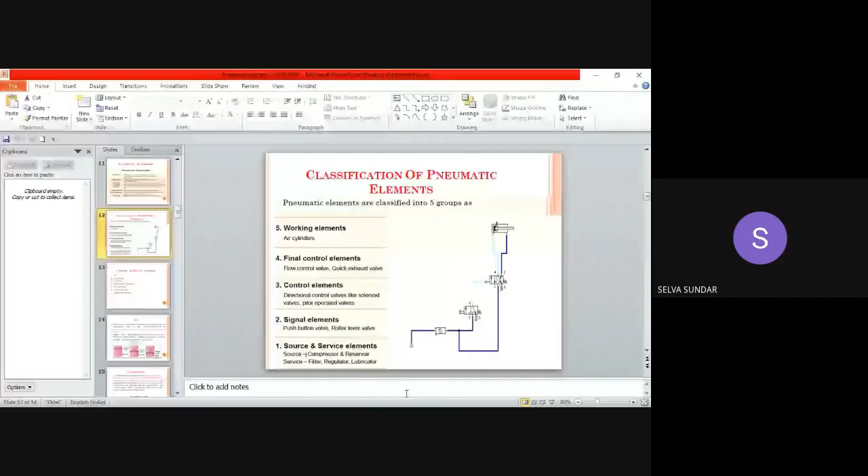So I hope my screen is visible to all. Whether my screen is visible? Yes sir, yes sir, it is visible.

So I welcome you all to this 3-day workshop on building smart automation design without coding. Today's session we are going to discuss about the pneumatic system - how automation can be done with the help of a pneumatic system, and what components are required to design and frame a pneumatic circuit for automation purpose. These are the topics we are going to discuss in this session. If time permits, at the end of the session, we will work on a hands-on session.

Before entering into the pneumatic system, we must know what is meant by automation. Automation is basically the delegation of human control function to technical equipment for the purpose of increasing productivity, increasing quality, increasing safety in working conditions, as well as reducing the cost. So the purpose of automation is to replace the human control function with technical equipment in order to improve certain criteria.

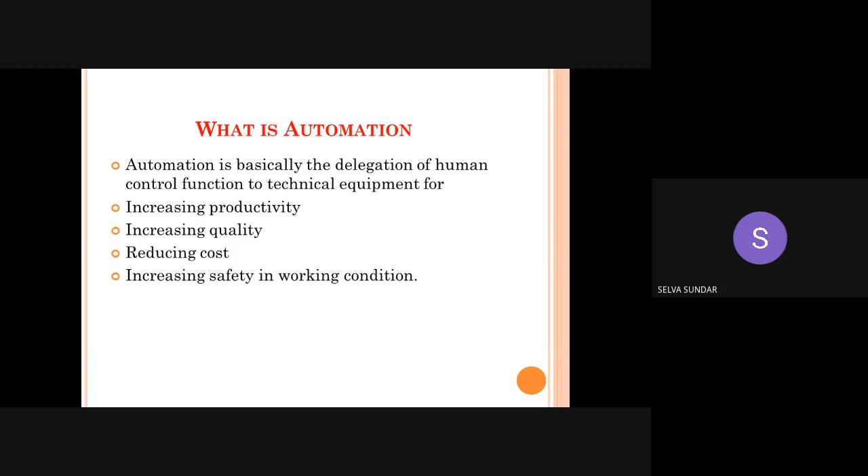Next, industrial automation is classified into 3 categories. The first one is pneumatics and hydraulics based automation, the second is electrical based automation, and the third is electronics based industrial automation. Out of these 3, pneumatic systems are used in achieving low cost automation in industries in order to reduce labor cost, reduce machine investment cost, increase productivity, and reduce human efforts.

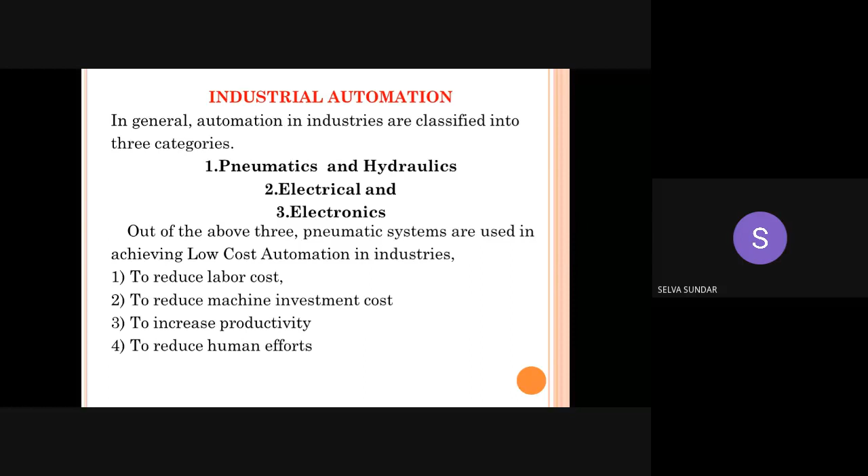Before entering the pneumatic system, we must know the difference between pneumatics and hydraulics. What is meant by pneumatic system? Air or gas is used for working of the system in pneumatic system. In hydraulic system, fluid is used for working of the system. In pneumatic system, the producing power is less, but in hydraulic system, more power can be produced.

In pneumatic system, it is able to work at pressure up to 10 bar, but in hydraulic system, it can work from 100 bar up to 700 bar. That is the main difference. Working pressure is only 10 bar in pneumatic system, but in hydraulic system we can work up to 700 bar pressure. Next, in pneumatic system, the working fluid is available at cheap rate, because we are using air as the source.

Air is readily available in the atmosphere, but in hydraulic system, the working fluid is costly as compared to pneumatic system. In pneumatic system, this process is clean, but in hydraulic system, the maintenance is the major problem. In pneumatic system, it is easy to operate, even unskilled labor can operate a pneumatic system. But in hydraulic system, with high pressure, it is difficult to operate. Only a trained person can operate the hydraulic system.

In pneumatic system, the maintenance is easier and quicker. But in hydraulics, the maintenance is not easy. The last difference is that pneumatic system has low initial as well as operating cost, but in hydraulic system, it has higher initial and operating cost. So this is the basic difference between hydraulics and pneumatic system.

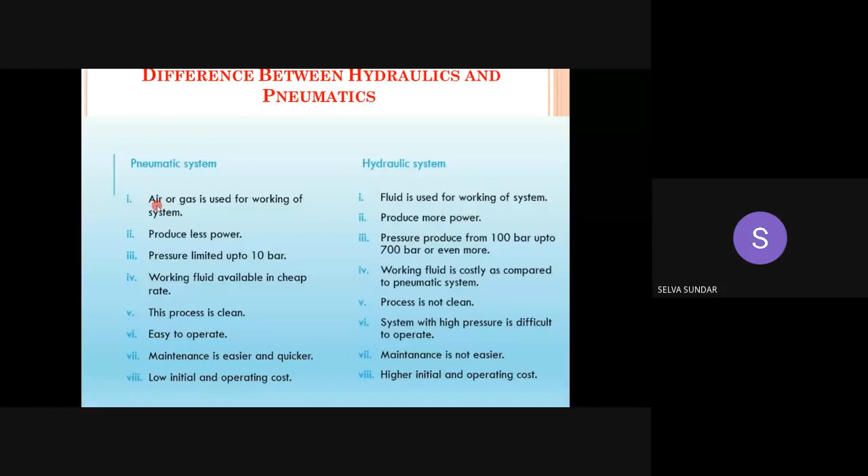But today we are going to discuss pneumatic system. Pneumatic system can work up to a pressure of 10 bar. So that is the main thing we have to keep in mind while designing our pneumatic circuit for automation purpose.

We move on to pneumatics. We must know what is meant by pneumatics. We already know pneumatic is nothing but air which is readily available in the atmosphere. The word pneuma is derived from the Greek. Pneuma is nothing but breath or air.

Pneumatics is the application of compressed air or pressurized air to power the machine or control or regulate the machines. Simply put, pneumatics may be defined as a branch of engineering science which deals with the study of the behavior and application of compressed air. So pneumatic is nothing but compressed air. With the help of pressurized or compressed air, we are going to give power to the machine or control the machines. That is the main definition of pneumatics.

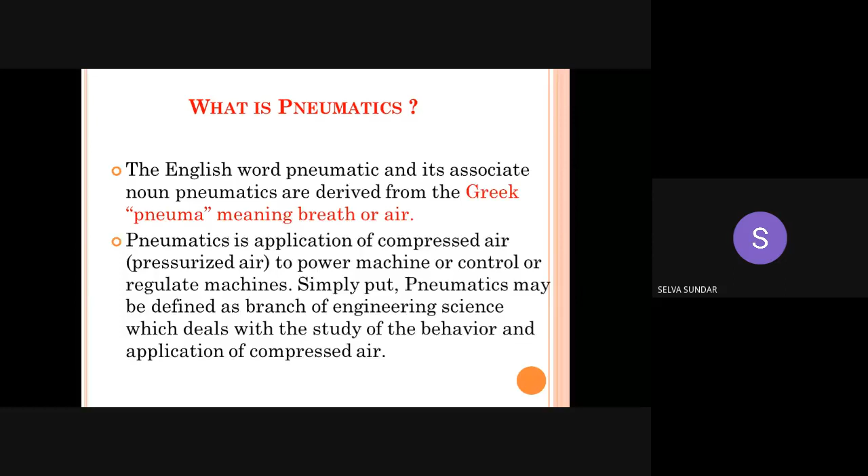We have another definition according to our mechanical division. We can call pneumatics a mechanism which uses air pressure to apply mechanical force and displacement. So we can write the definition of pneumatics in mechanical division as: mechanism which uses air pressure to apply mechanical force and displacement. The pneumatic devices we use are basically binary actuators, which we use for automation purpose. The linear actuator means the cylinder.

The cylinder, inside the cylinder we have a piston. The piston can either extend or retract. So we are going to design our pneumatic system in a linear way by using the linear actuator, meaning we can extend our cylinder as well as retract our cylinder with respect to our requirement.

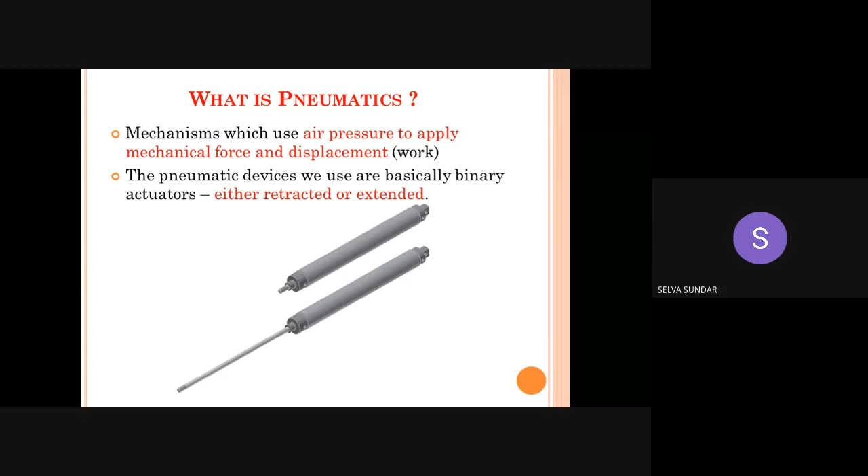The advantages of pneumatic system: we already know it is easy to control, can apply a lot of force from small light packages. It is inexpensive, it is easy to clean. Next, pneumatic tools when overloaded will stop and so are safe as compared to the electrical system. This is the main important advantage of pneumatic system when compared to the electrical system. Next, no fire hazard as in electrical system, so it can be easily used in dangerous areas like mines.

In mining areas also, we can use the pneumatic system instead of electrical system. Next, simple in construction, the pneumatic system components are easy to maintain and repair. We already discussed this in the difference between hydraulics and pneumatics. The last advantage is that the used air is exhausted, so there are no return lines as in the pneumatic system. We don't need to maintain a returning line because we just send out the exhausted gas or air from the cylinder to the atmosphere.

Okay, that is the main advantage of pneumatic system.

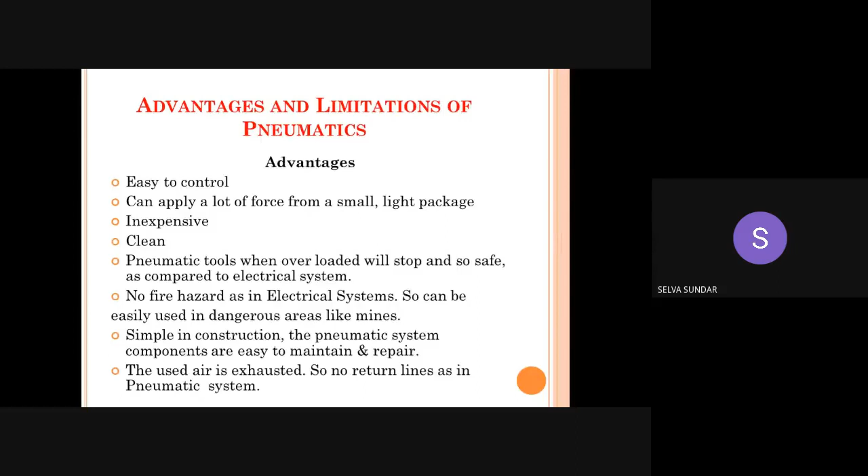Next, the disadvantages of pneumatic systems. The first is lack of precision control, so it's not possible to maintain 100% accuracy in automation using pneumatic systems. The second disadvantage is sensitivity to vibration, which is a major problem since a lot of vibration is created while using pneumatic systems, so we have to reduce it using a damping system. The next disadvantage is that it is loud and noisy, with a very high noise level. These are the major disadvantages of pneumatic systems.

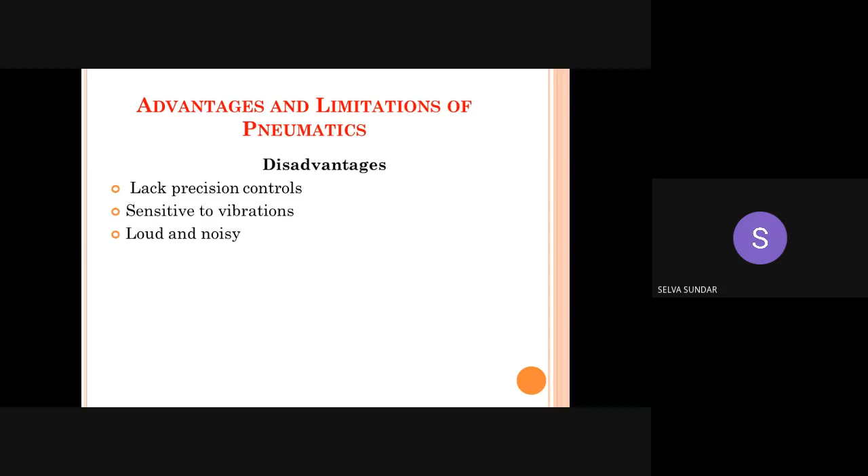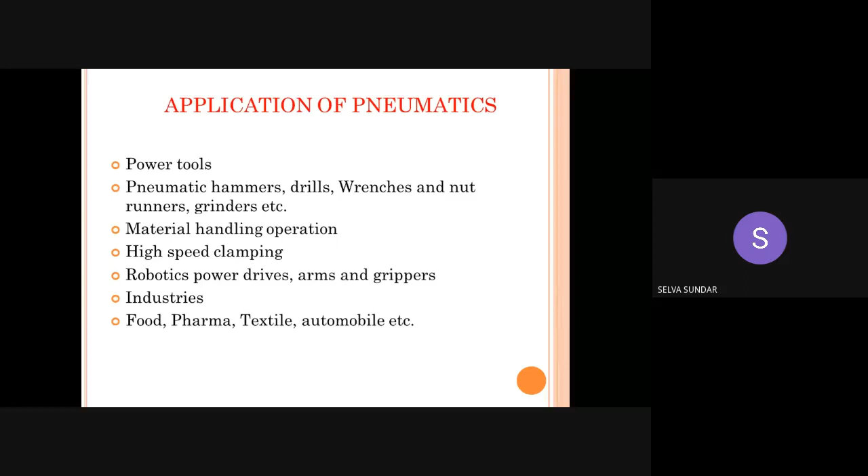Next, the applications of pneumatics. Pneumatics are used in various areas like power tools, pneumatic hammers, pneumatic drills, pneumatic wrenches, pneumatic nut runners and grinders. Also material handling operations, high-speed clamping, robotics power drives, arms, and grippers. Many industries use pneumatic systems for automation, including food, pharma, textile, and automobile industries. These are the applications of pneumatic systems.

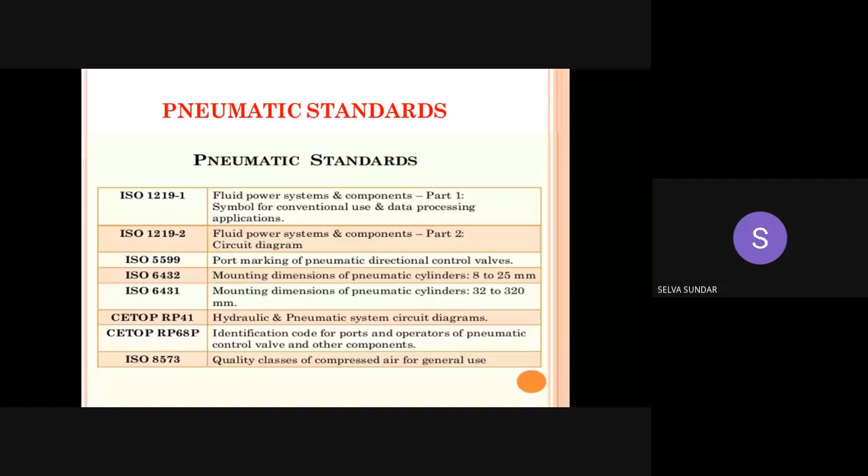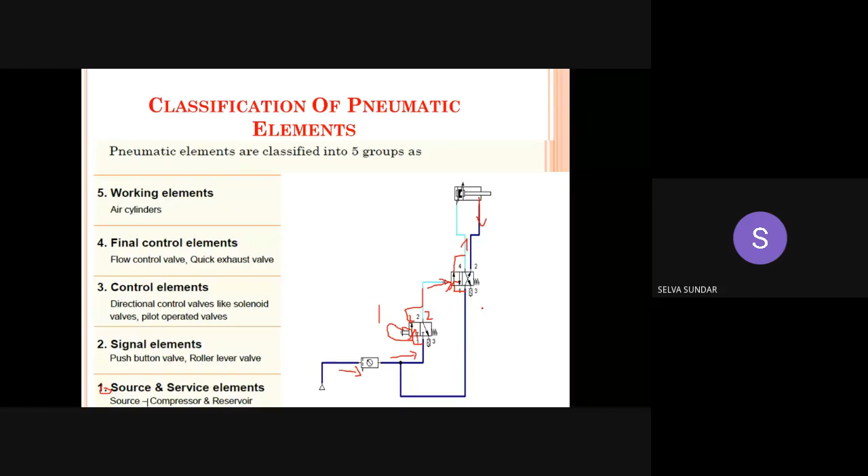So this is the basic working of pneumatic circuits. Now we will discuss one by one the various components available in pneumatic circuits. First, the source and service element.

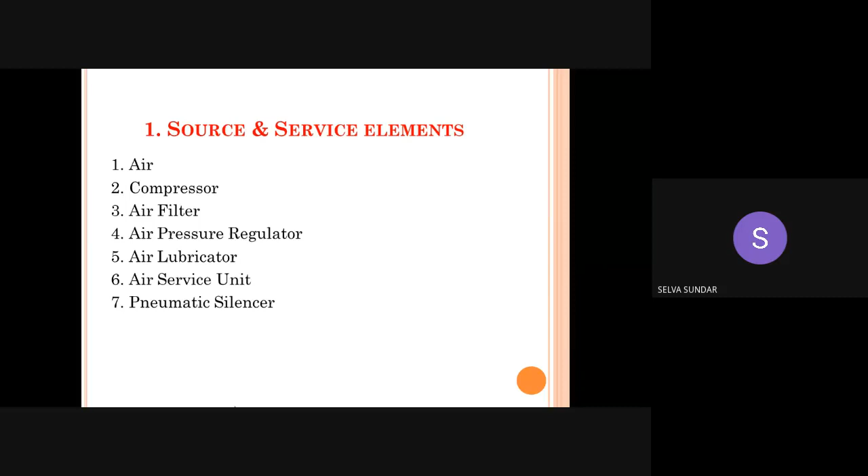The source and service element normally contains these categories: first is air, second is the compressor, third is the air filter, fourth is the pressure regulator, fifth is the air lubricator, sixth is the air servicing unit, and seventh is the pneumatic silencer. Air is the main source of the pneumatic circuit.

We already know air is readily available in our atmosphere. Due to the compressibility of air, increasing the pressure causes a decrease in the volume of air. Our pneumatic circuit works with the help of air from the atmosphere, and this pneumatic air works under the principle of Boyle's law.

So what we must know is what Boyle's law means. Boyle's law states that pressure and volume are inversely proportional to each other — if the pressure is increased, the volume automatically decreases. That is Boyle's law, as long as the temperature does not vary. So Boyle's law is nothing but PV equals constant, as long as the temperature does not change.

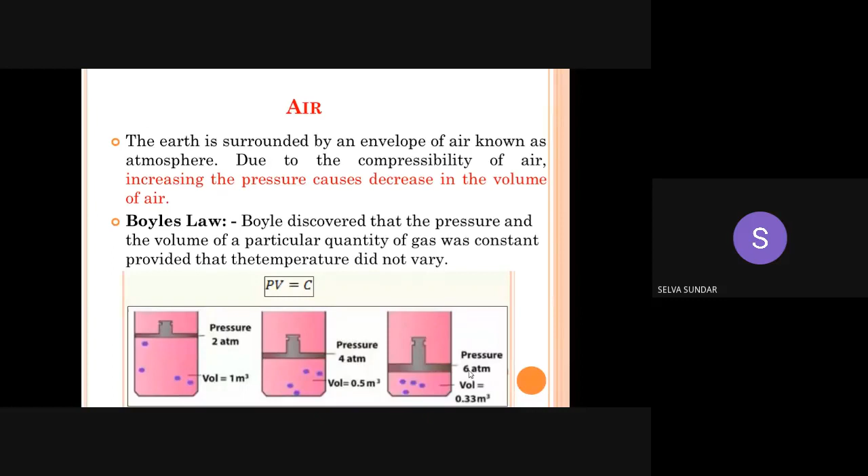By using this principle only, our pneumatic system is working. The principle is Boyle's law — pressure and volume are inversely proportional to each other as long as the temperature does not vary, that is, PV equals constant.

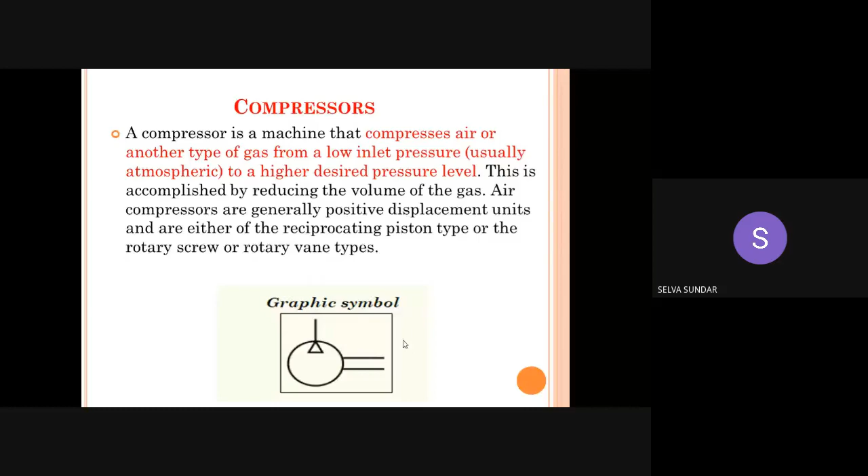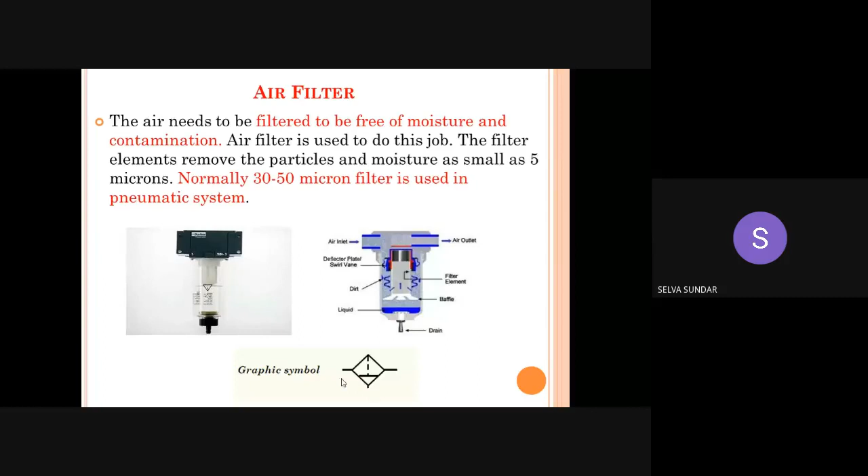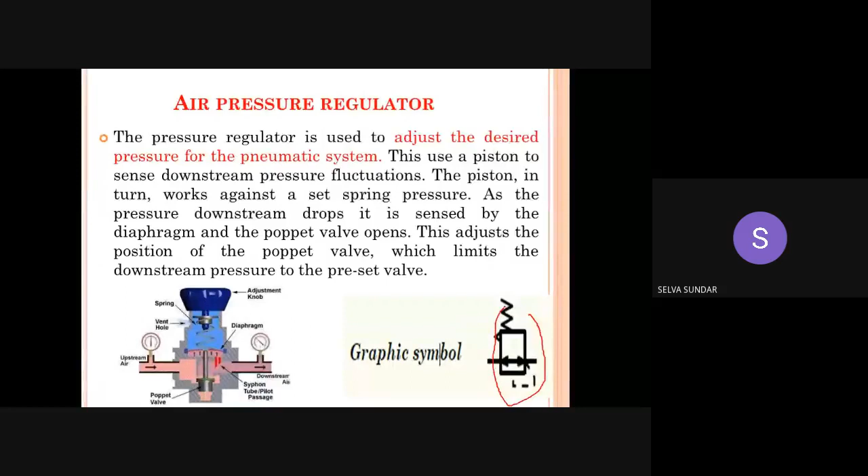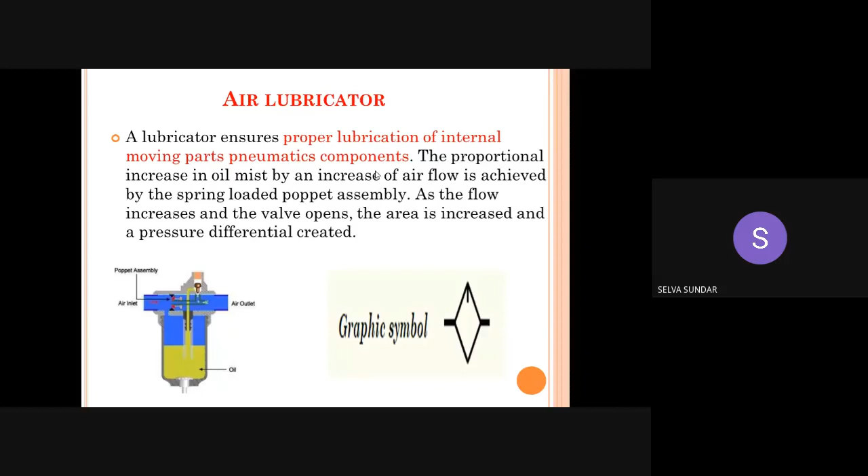Next, air lubricator. The lubricator ensures the proper lubrication of internal moving parts of pneumatic components, because we have a large number of moving components available in the pneumatic system. Due to the friction, heat will be generated, so we need to reduce the heat level. For that purpose only we use air lubricator. By using the air lubricator, we can reduce the heat generation level. This is the symbol of air lubricator.

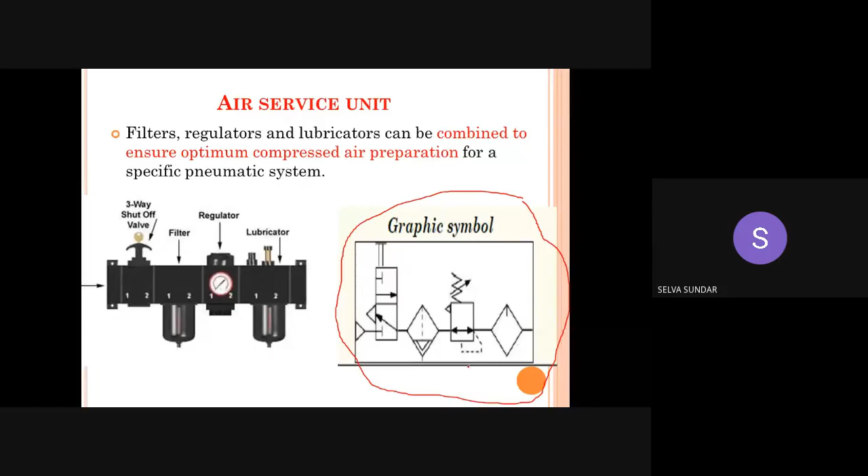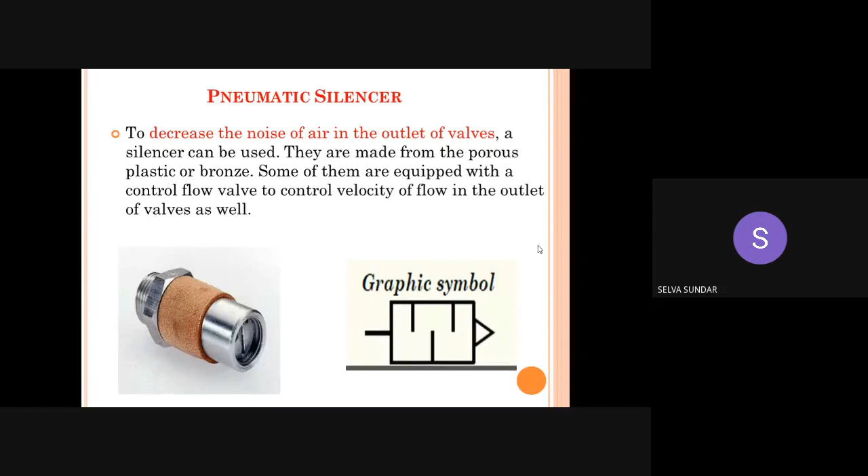Next one is the pneumatic silencer. The purpose of using pneumatic silencer in the pneumatic system is to reduce the noise of air at the outlet of the valve. It's just like a silencer which is used to reduce the noise level while emitting air to the atmosphere. This is the graphical symbol of pneumatic silencer.

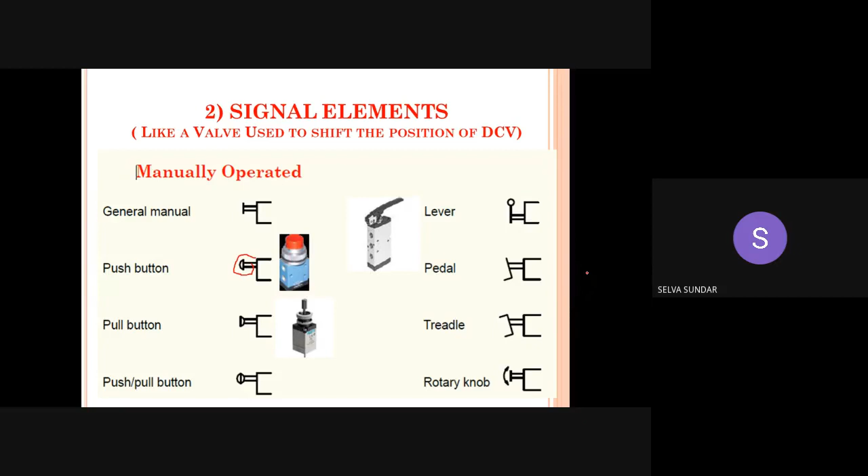Next, push or pull button. Next, lever type. Next, pedal type. Next, treadle, which is nothing but the kind of valve or switch we already use in our sewing machine. Next, rotary knob. So these are the manually operated valves. By using these valves, we are going to shift the position of the direction control valve.

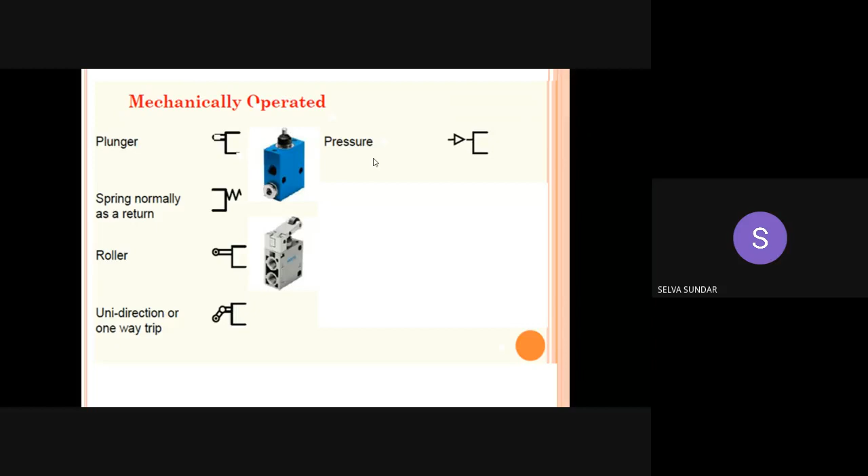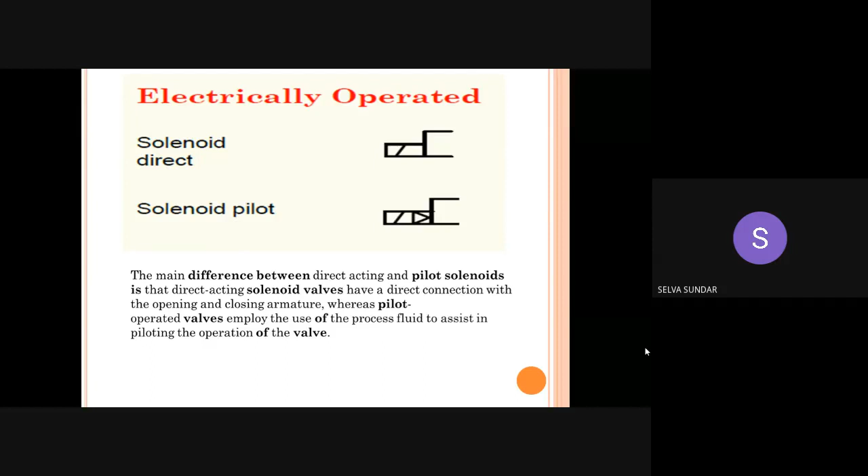Next, solenoid pilot. What is the difference between the direct solenoid as well as the pilot solenoid? The direct acting solenoid valve has a direct connection with the opening as well as closing armature, which means our cylinder. Whereas the pilot operated valve employs the use of a process fluid to assist in piloting the operation of the valve. That is the main difference between solenoid valve and pilot operated solenoid valve. That's all about the signal elements.

Next, our third and main important element is direction control valve. The direction control valve is the extend and retract control for your pneumatic cylinder. It provides a flow path from the compressor to the cylinder and a return path from cylinder to the atmosphere. The purpose of using direction control valve is to change the direction of flow of air to the cylinder and to the compressor.

We have various types of direction control valve. First one is 2x2, next one is 3x2, 4x2, 5x2, 5x3. We must know what is the meaning of 2x2.

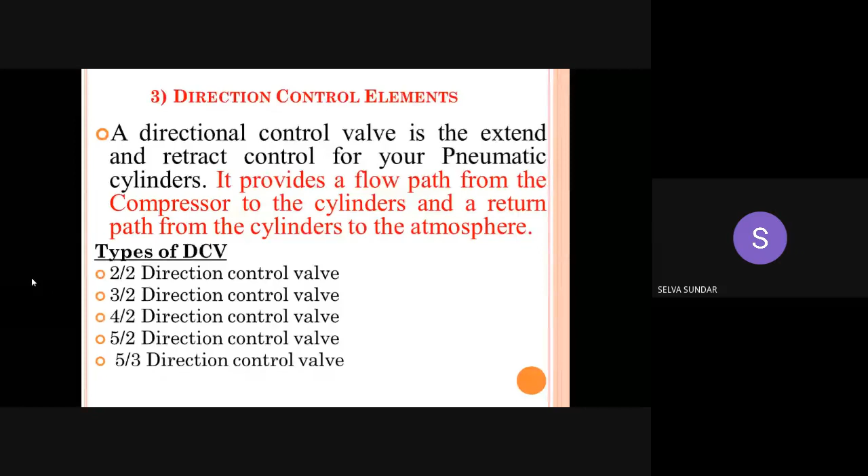The numerator value mentions the number of ports, or number of holes, available in the direction control valve. The denominator value mentions the number of positions in the direction control valve.

Let's see one by one. Before we enter the direction control valve topic, we must understand the number of positions as well as the number of ports in the direction control valve. First, we will discuss the number of positions.

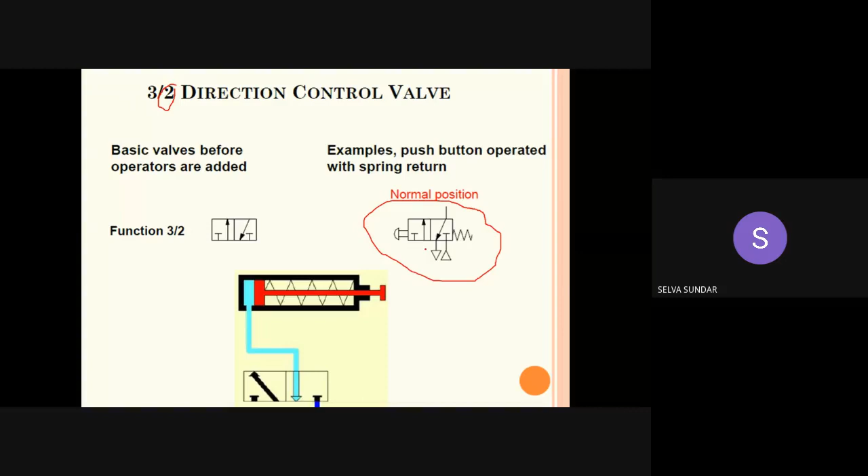Okay, next, the example for 3x2 direction control valve. So here I have 3x2 direction control valve. Why do we call this direction control valve as 3x2? Because the number of positions is 2, here we have 2 square boxes, so the number of position is 2. And the number of ports is 3. The air can enter through this way and exit through this way, so number of port is 2, as well as the air can enter through this way also, the shut-off valve, but it can't exit. So the number of ports available in this position is 3.

So that's why only we call this direction control valve as a 3x2 direction control valve, as well as here the actuating device, the actuating valve is push button. So with the help of push button, with the help of the actuating valve also, you have to mention your direction control valve. So the name of this particular direction control valve is 3x2 push button spring return direction control valve. Likewise only we have to call our direction control valve. Okay, next.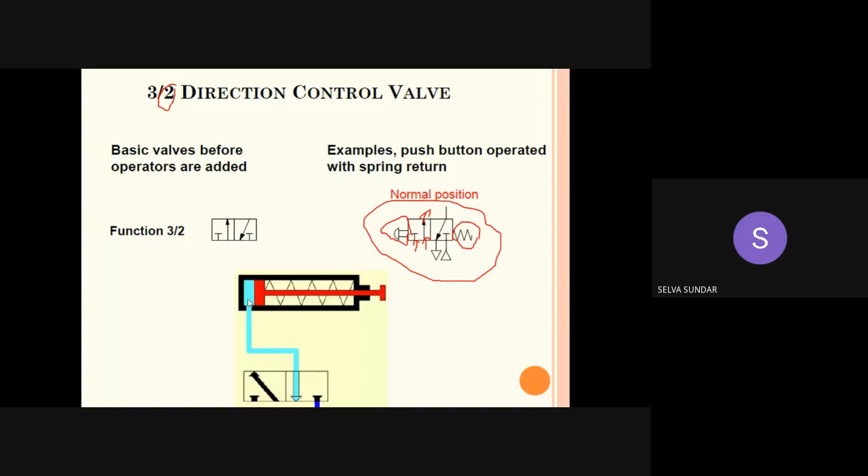So the same slide. The previous one is before extending the cylinder. The second slide I mentioned is after extending the cylinder. Next, the 4/2 direction control valve.

I think now you are all familiar about number of ports as well as number of position. Here the number of position is 2, as well as the number of port is 4, because it can enter through this way, it can exit this way. So number of port is 2, as well as the air can enter through this way and it can exit to the atmosphere through this way. So the number of ports available in this position is 4. The same number of ports should be present in the next position also, so here also we have 4 ports. So this direction control valve is 4/2 push button spring return direction control valve.

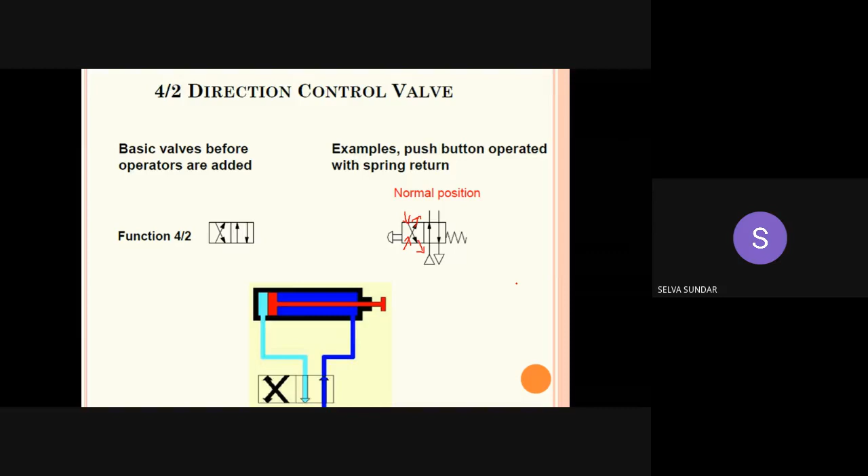So next, 5/2 direction control valve. So here the 2 is nothing but number of position. Here number of position is 2. The number of port is 5, so 1, 2, 3, 4, 5. So the number of ports available in the first position is 5. The same ports should be available in the second position also. So the name of this particular direction control valve is 5/2 push button spring return direction control valve.

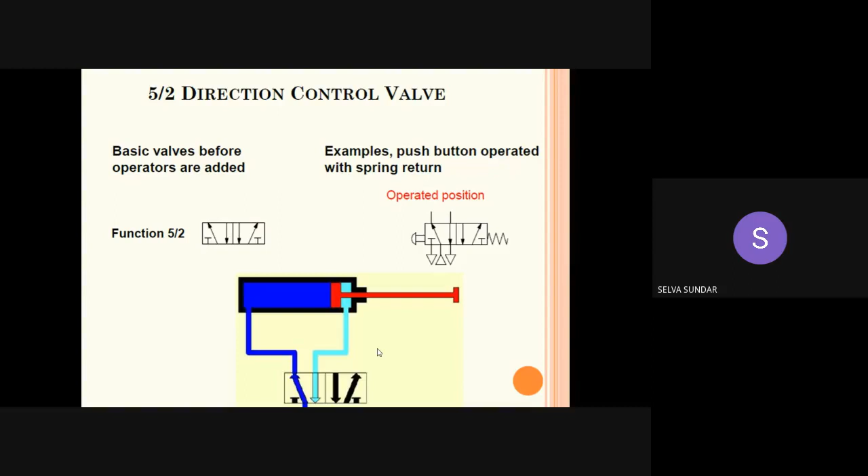Okay, next, the same one. So in the previous slide, I just showed before extending the cylinder. The next slide I mentioned is after extending the cylinder. We will discuss all these things in the designing part. So next, the 5/3 direction control valve.

Here the 5/3 direction... Initially, I have a compressor. With the help of the compressor, I can increase the pressure of air. So the pressurized air is straight away sent to the FRL line. FRL is nothing but filter, regulator, lubricator line. Filter is used to remove the dust particles from air. Regulator is used to regulate the pressure, depending on our required pressure level. The lubricator is used to reduce the temperature level generated in the pneumatic system.

So after coming out from the FRL line, that line should be connected to port number 1 for all the direction control valves. Here I use 3 direction control valves. So this is the first one, this is the second direction control valve, and this is the third direction control valve. So all these 3 direction control valves should have the pump or pressure line, that is number 1 port.

So the air comes out from the FRL line, that line should be connected to all direction control valve port number 1. So here I connected.

Okay, here I have a 5/3 direction control valve. Why I mentioned this as 5/3 direction control: the number of positions is 3 - position 1, position 2, and position 3. As well as the number of ports present in the first position is 5: 1, 2, 3, 4, 5. The same number of ports should be present in the remaining positions also. So that's why we call this a 5/3 direction control valve.

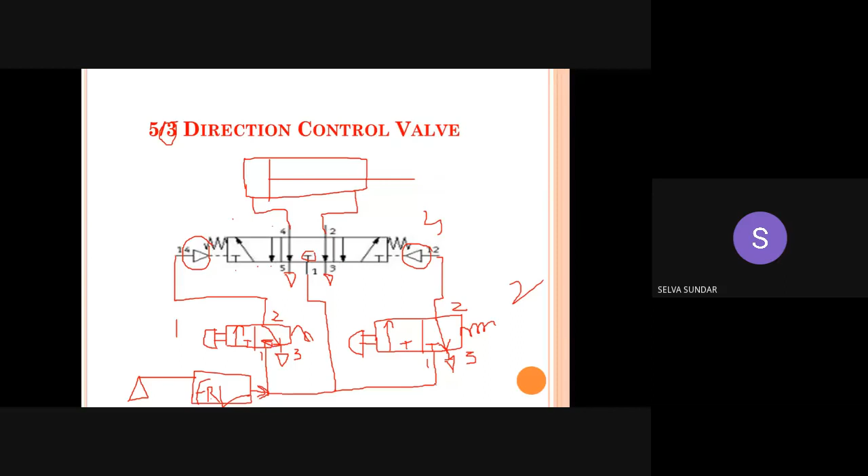So what happens if I press the push button of the first direction control valve, the direction control valve shifts the air position. The pump line 1 is connected to this port. The air from the FRL line is straight away sent to this port, and this one is our second port. Now this line is shifted to this line.

So the air coming out from port number 2 is straight away connected to this line because it is shifted due to the pressing of the push button. Now the air is straight away sent to the pilot valve, which is available at the left end of the main direction control valve.

The purpose of using the pilot valve is, if it receives the air, it will shift the position of the direction control valve. Now the pilot valve receives the air, so automatically it shifts the position of the direction control valve. So the number 1 pump or pressure line is straight away connected to this line, which is connected to the left end of the cylinder line, and this line is connected to the right end of the cylinder line.

So the air coming from the FRL line is straight away sent from port number 1 to port number 4, to the left end of the cylinder. Due to the application of pressurized air, the cylinder can move from left end to right end.